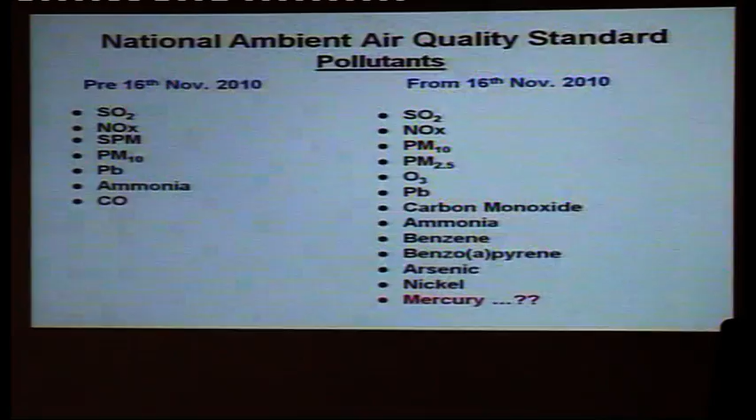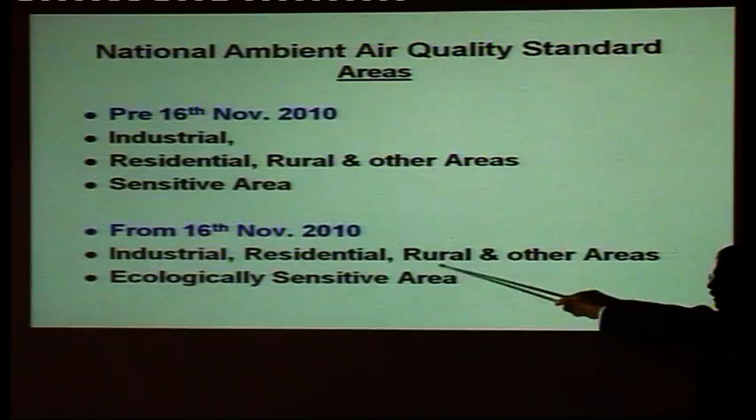Now the ambient air quality, this has already been discussed with Dr. G.D. Agarwal. Now only two guidelines have been left. The industrial area classification has been done away with.

Now why do we monitor ambient air quality? Because we have to comply with the standards that have been set, certain limits are there. We cannot see by naked eyes whether the pollution is there or not, or what the level is. If the level is high, we have to identify the sources and take remedial measures, the control measures, the control equipment to be installed.

So we have to monitor the ambient air quality, depending on the situation, to assess the health effects and potential damage to property, and to determine the background level of pollution.

Suppose you are going to set up an industry, under EIA the baseline quality is to be established. What is the status before the plant comes up, and what will be the status after the plant is commissioned. That is done by mathematical modeling.

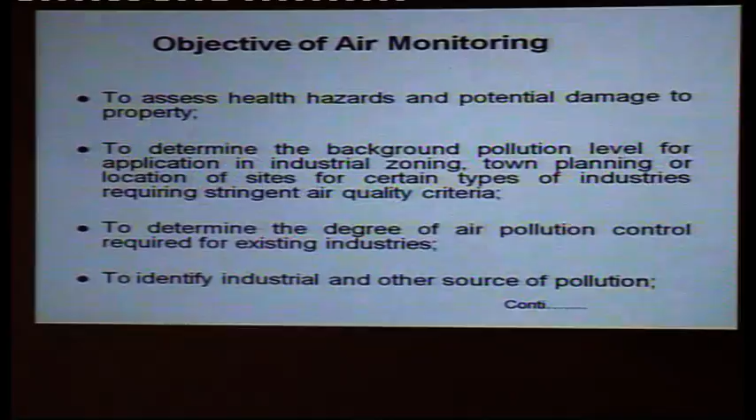The baseline and the predicted values are superimposed, and we come up with the ultimate quality of the ambient air. So we can foresee the management tools needed.

The criteria pollutants depend upon the location; certain pollutants are already specified. Those pollutants which are not specified are sometimes asked to be monitored depending on the industry. Like in the petroleum industry, you have to monitor VOCs and hydrocarbons also, as required by local state pollution control boards.

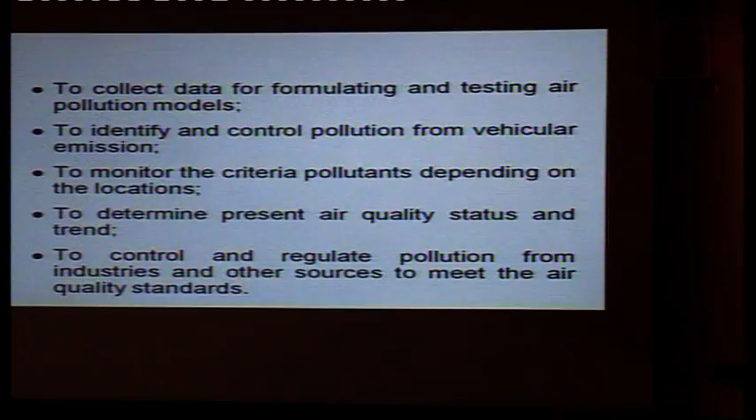Now we come to site selection. The site selection criteria is important. Quality assurance and quality control in air quality monitoring is essential, along with the type of pollutant to be monitored in a city.

If you are monitoring in the city, we have to look for vehicular emissions, because in the urban area the major pollution is from automobiles, besides the industrial locations.

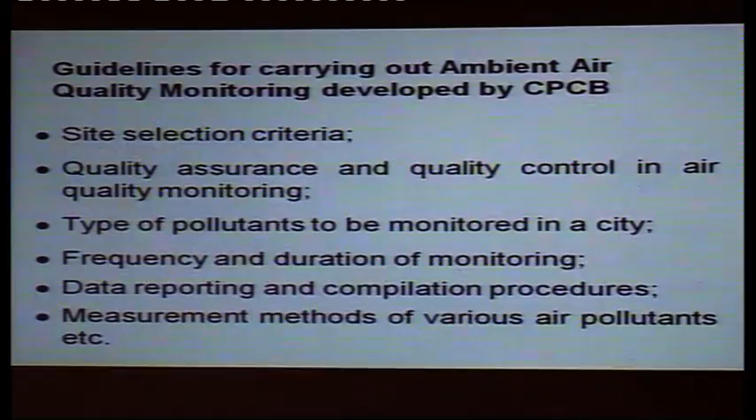The site should be representative of the location being assessed. It should not be unduly influenced by its immediate surroundings unless that influence is specifically being measured—for example, near a busy road, a factory stack, or a dusty quarry. The site should not be subject to flooding, and the site's classification or situation should not change over time.

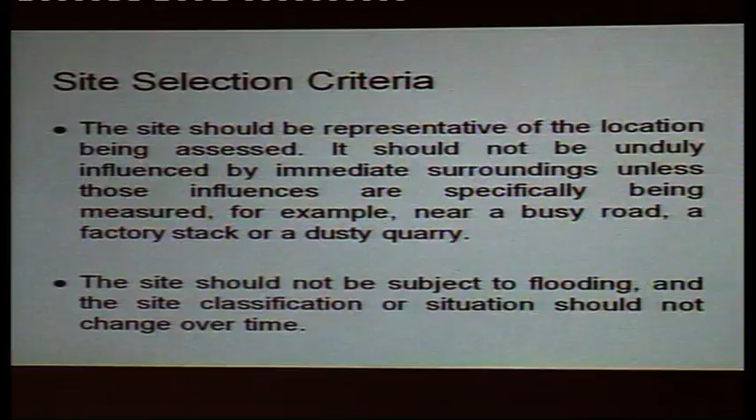Certain other requirements are also considered, such as accessibility of the site, power requirements, and safety. These are to be considered when fixing the monitoring station.

One has to feed them with fuel, and fuel will also emit certain pollutants which can interfere with the local air quality. If we have to do the monitoring with the help of these generators, they should be kept downwind, at least 100 meters away from the samplers.

Now coming to sampling: suppose we want to sample any environment, we need three things. First, a suction or vacuum device, and a metering device to measure at what flow rate we are drawing the air. Ultimately, we are interested in knowing the exact quantitative volume of the air that has been sucked.

And then a trapping device—for particulate matter, this may be a filter. For any gaseous volume, we have to impinge or adsorb it on charcoal. If it is an organic compound, it has to be absorbed in silica gel or activated charcoal. If it is an inorganic gas, it has to be absorbed in a proper solution, which can then be subjected to quantitative analysis at a later stage.

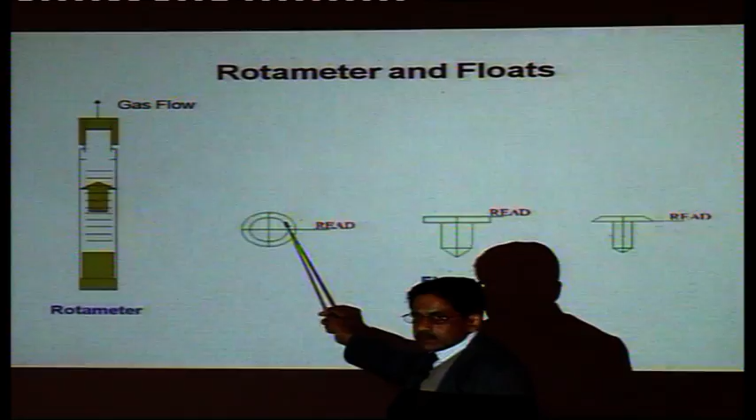First of all, the reading should be taken at the eye level, straight. If you take a reading from here, you will find a higher value. If you take a reading from here, you will find a lower value. So one should know what is the exact flow rate of the rotameter.

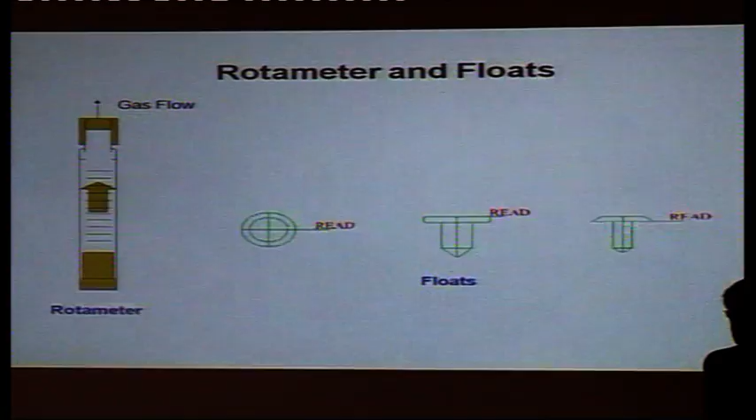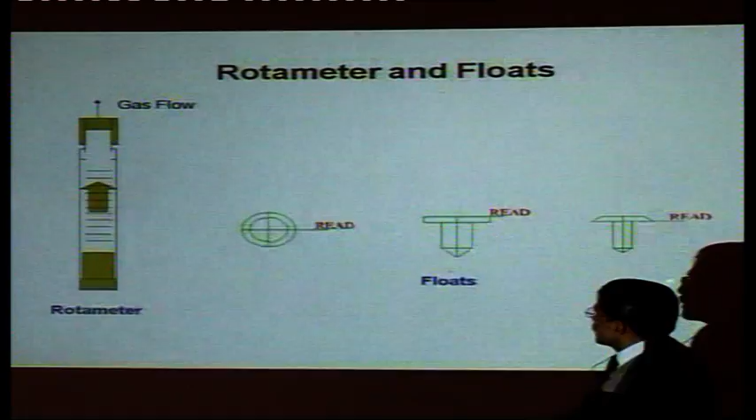There are various types of rotameters available in the various machines manufactured by different manufacturers. Suppose we have to take the reading at the widest part of the float. This is circular, you have to take the diameter at the highest point. This is a float, we have to take the reading at the upper float. And in this type of float, we have to take the reading at the widest part of the float.

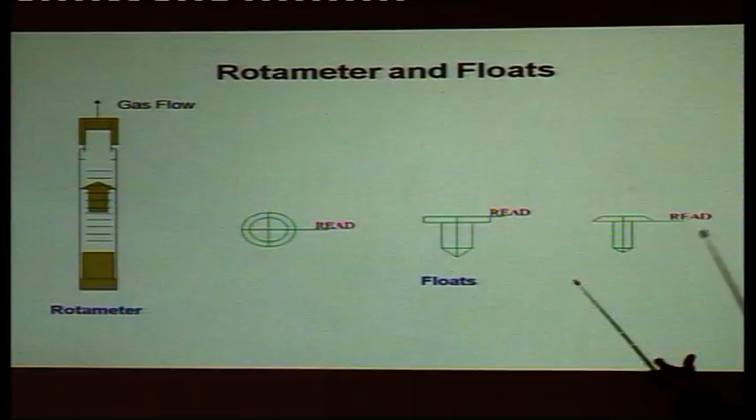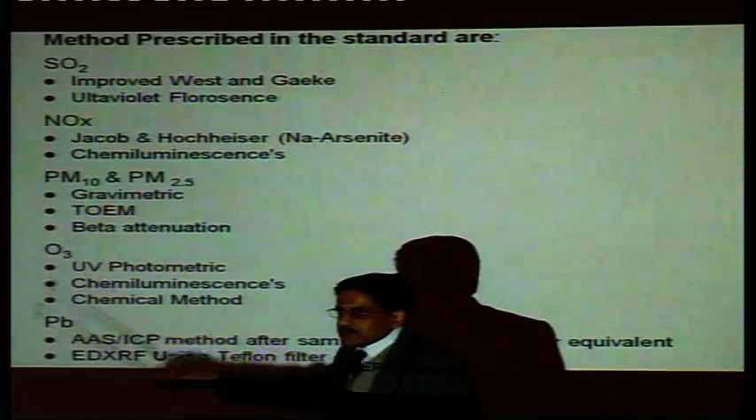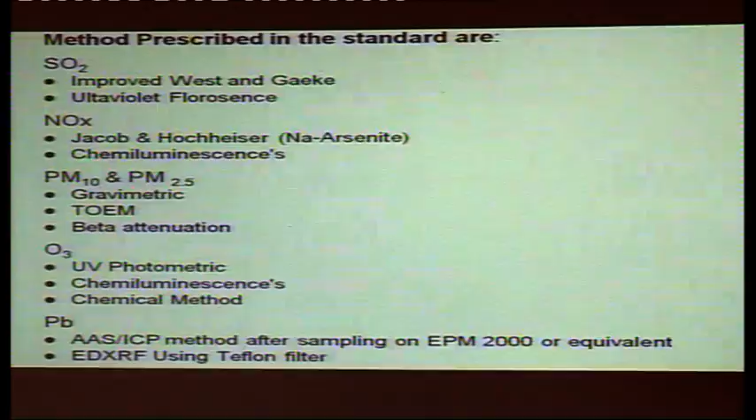For lead, it can be done by AAS, ICP, or emission, EDXRF using Teflon filters. CO can be measured using non-dispersive analyzers. It is recommended by the board, but BIS standard says it can be monitored by a number of methods. But those methods are not realistically possible.

One method is a CO detector. The CO detector has a limitation, it cannot work at ambient air quality levels. The level present in ambient air quality, it cannot monitor that level. Generally, ambient air quality CO is now available at less than 1 or 2 ppm, so that is not possible to monitor with detector tubes. And besides, if we can monitor those limits, the results are about plus or minus 10 to 20%.

One method given in the BIS method for CO is iodine pentoxide. If you monitor through the iodine pentoxide method, you need to keep the sampling tube at 175 degrees centigrade in the field. So you have to carry a small oven in which you put this tube, and you have to maintain 175 degrees centigrade, which is not possible.

Then we can have gas sampling bags. Any gas sampling bag will not do. The Mylar or Tedlar bags, imported from the USA by SKC company or some equivalent make, do not interfere with the pollutants. You collect about 5 or 10 liters with this low volume sampler into a gas bag, take the bag into the laboratory and do the analysis by GC-TCD, or by converting it into a catalytic converter with FID. This is how CO can be done.

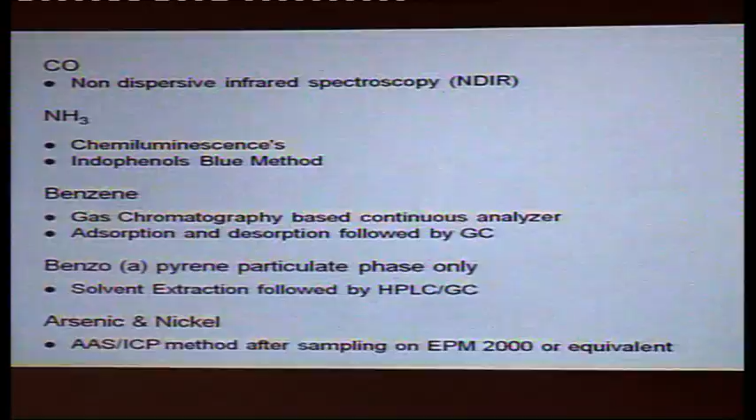Benzene is measured by a gas chromatography based continuous analyzer, or by adsorption and desorption followed by GC. Benzopyrene is in the particulate phase, it can be extracted by solvent extraction and quantified by HPLC GC, which can be covered later on. Arsenic and nickel are measured by AAS and ICP.

The type of sampling we are interested in for monitoring average air quality is 24 hour or annual averages. For that matter, we have to take the readings as specified. But at certain times we are interested in episodic sampling, grab sampling, excursions. Suppose we are going to check as an enforcement agency for an industry, we want to take a grab sample, so in a short duration it is called a short duration sample. In contrast, batch sampling and baseline data is collected over 24 hours.

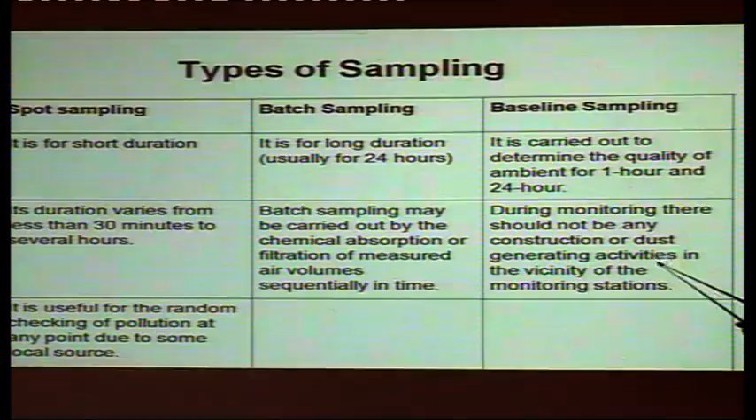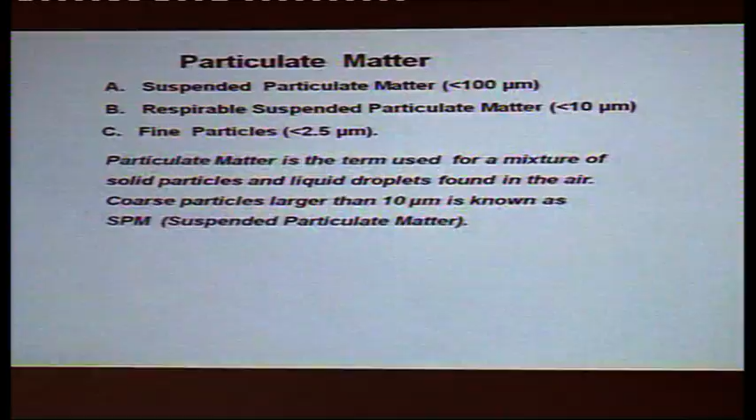Total particulate matter, all particles suspended in air less than 100 micrometers, is called suspended particulate matter. Respirable suspended particles are those less than 10 micrometers, and fine particles are called 2.5 micrometers.

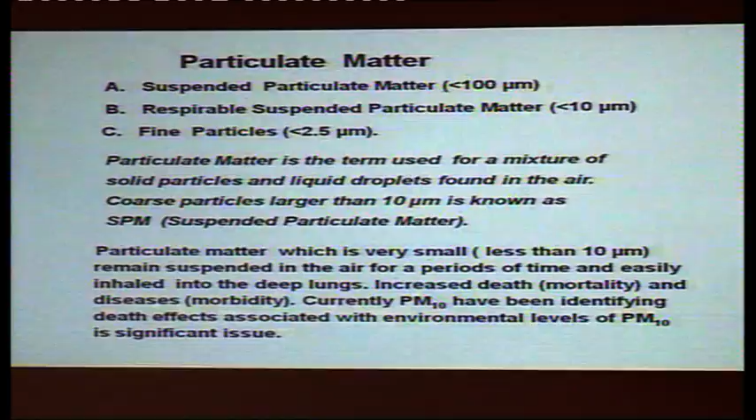As per the new notification, it measures PM10 and PM2.5. A known volume of air is passed through an initially weighed glass fiber filter paper, GF/A of size 8 into 10 inches. We are using this normal filter paper for gravimetric methods.

Suppose one wants to monitor arsenic, lead or trace metals. For metal, when you are going for trace metal analysis, you have to monitor lead, arsenic and nickel. But the people who have an ICP at their end can monitor a number of metals at one go without any extra effort.

If you want to monitor PM10 on the filter paper, then you have to use EPM 2000 filter paper. EPM 2000 is a low matrix filter paper, with low background metals present in it.

The centrifugal force acts on the dust particles to separate them into two parts.

The dust collected in the dust grit pot is added to the concentration with the RSPM values. The grit plus RSPM is then reported as TSPM. That is wrong, because you cannot recover 100% of the dust from the cyclone. Certain dust sticks to the inner side of the cyclone, which we are not accounting for.

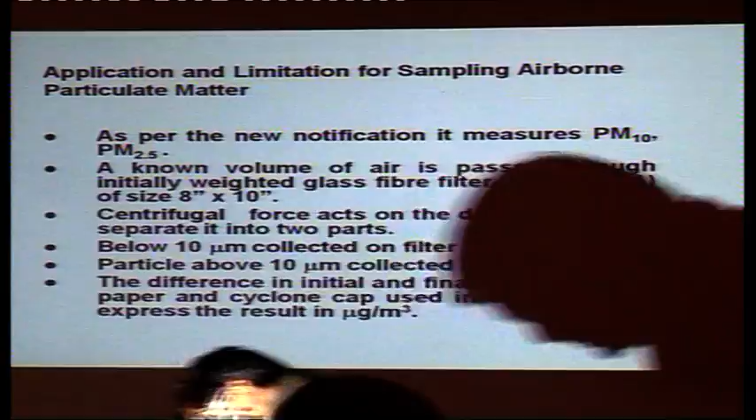The difference in initial and final weight of the filter paper and cyclone cap is used in calculation to express the results. If you are using the RDS sampler, then you can report the results as non-respirable fraction and respirable fraction. That is the other alternative.

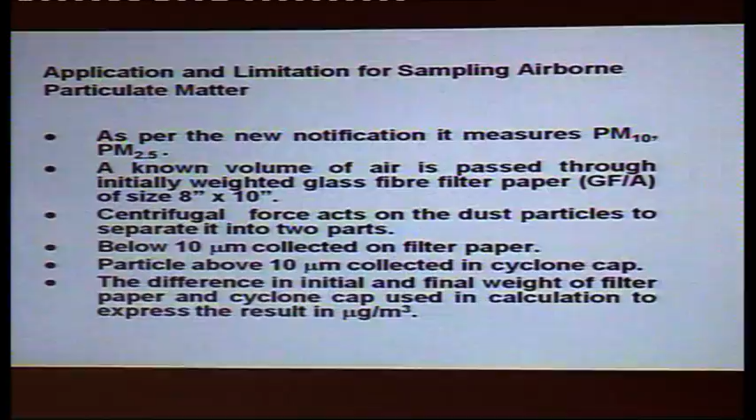Next, the filter paper is to be conditioned. The filter paper should be conditioned between 20 to 25 degrees centigrade and relative humidity less than 50% for 16 hours prior to weighing. Use fresh carbons.

Now, two types of motors are available for monitoring with the RDS: one with carbon brushes, and one brushless. When you are using carbon brushed motors, you have to take the precaution that when the carbon brushes have less than 5 millimeter length, you discard those filter carbon brushes, because otherwise they will harm your commutator and the motor will be burnt. Number one.

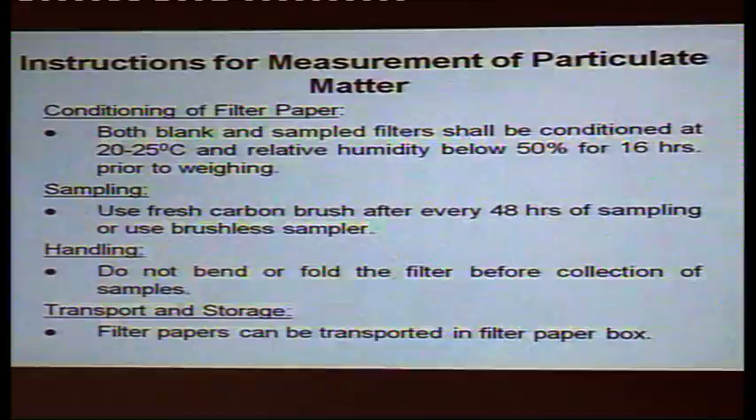Do not bend the filter paper before collection of the sample. The filter paper can be transported in filter paper boxes or in polythene bags. Next.

This is PM10, sampling of the respirable dust. This is wrongly printed here. This is part 23, involving the principle of filtering.

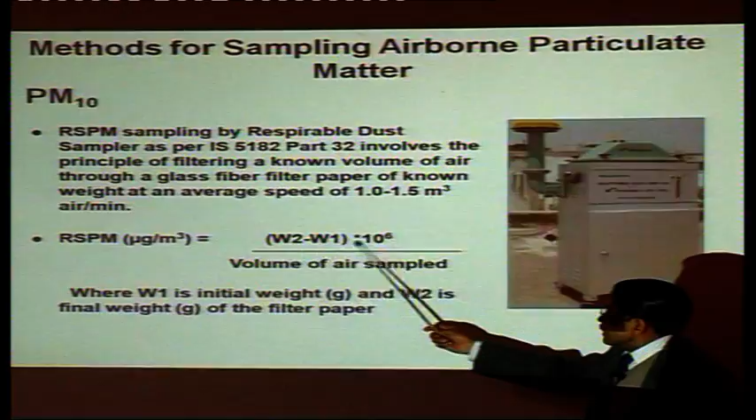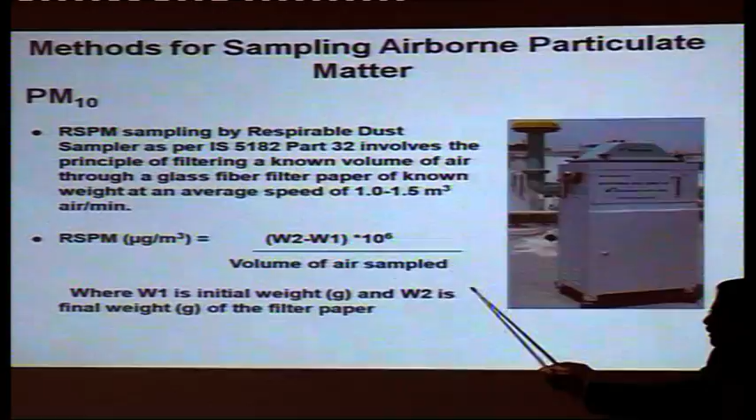Whatever dust concentration is there in grams has to be multiplied by 1000 to convert it into milligrams, and again multiplied by 1000 to convert into micrograms. This is the volume sampled in cubic meters. The volume is to be in cubic meters.

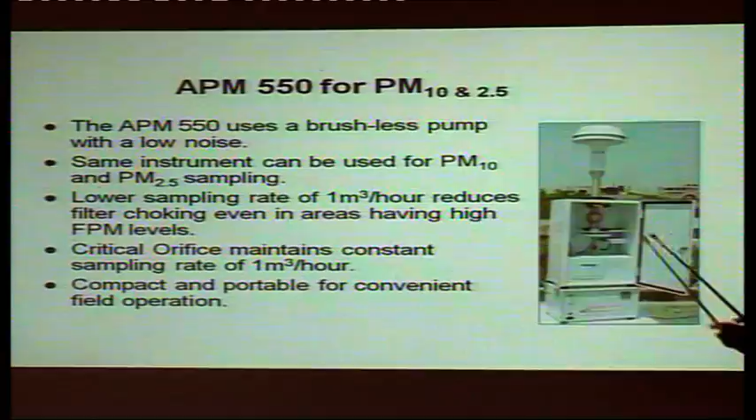Next, here you have seen the APM 550. By using this instrument, you can monitor PM10 or PM2.5 by changing the impactors.

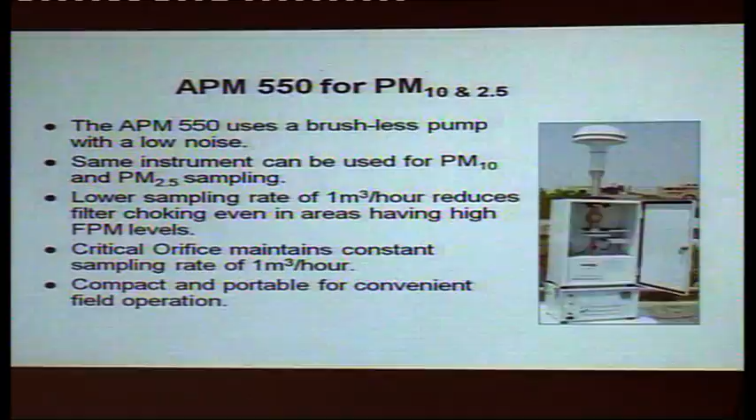Ideally, if you are monitoring ambient air quality at the same time, you should use two samplers, so that you have a comparison, because when you are monitoring PM10 one day and PM2.5 another day, the weather conditions and air pollution levels may not be the same. If you want to compare the results of the same day, you should use two instruments simultaneously.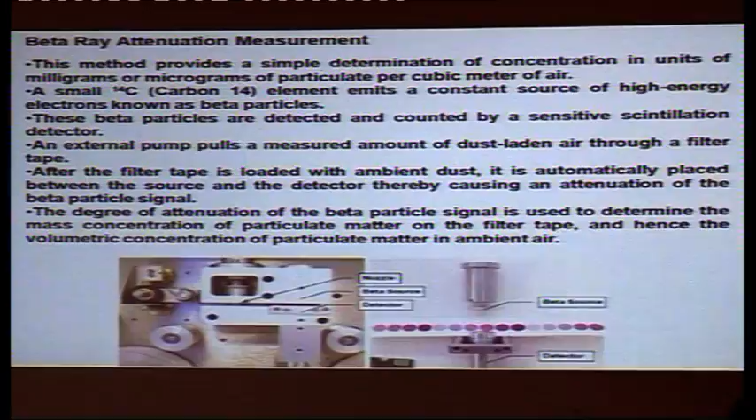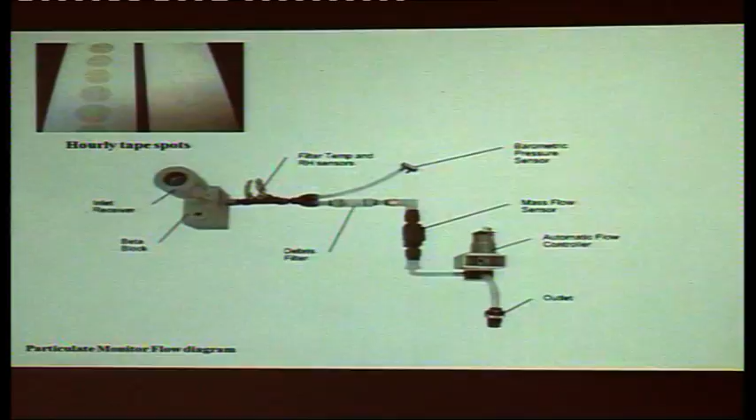Next, please. In the beta attenuation method, we also get these filter paper circles. We can take out these circles and analyze them, and a number of samples can be put together and analyzed for the chemical fraction. Next.

RDS is to be installed at a height not less than 1.5 meters. Ideally, it should be at a height of 3 meters, not more than the first floor of the buildings. Switch on the instrument and adjust the timer reading to the required hours of sampling flow rate.

Adjust to 0.5 liters or 1 liter depending on the need. First, run the machine for at least 5 minutes and let the motor stabilize. When the flow is stabilized, only then should you set the volume on the rotameter. Otherwise, it initially gives a higher reading. When the motor stabilizes, it gives the correct value.

Fill the filter impinger with 10 ml of the absorbing solution. Sampling is done for 4, 8, or 24 hours depending on the need.

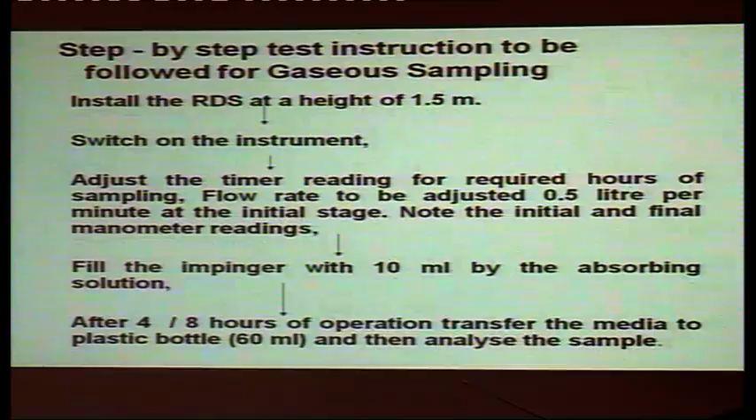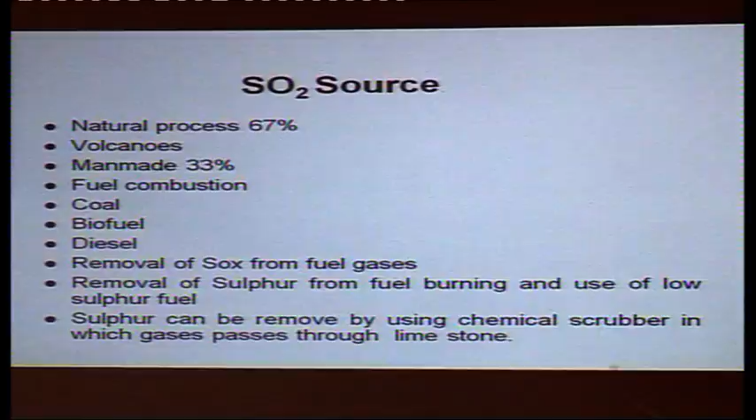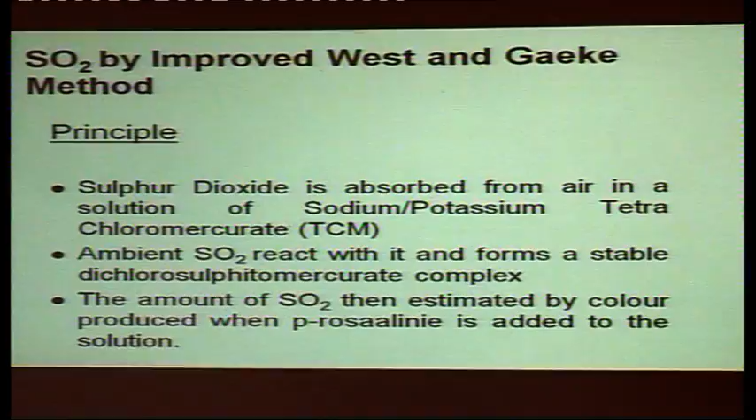Next, for SO2, the standards are here. Sulfur dioxide is absorbed from air in sodium or potassium tetrachloromercurate. Ambient SO2 reacts with it to form a stable dichlorosulfito-mercurate complex. The amount of SO2 is then estimated by the color produced by para-rosaniline.

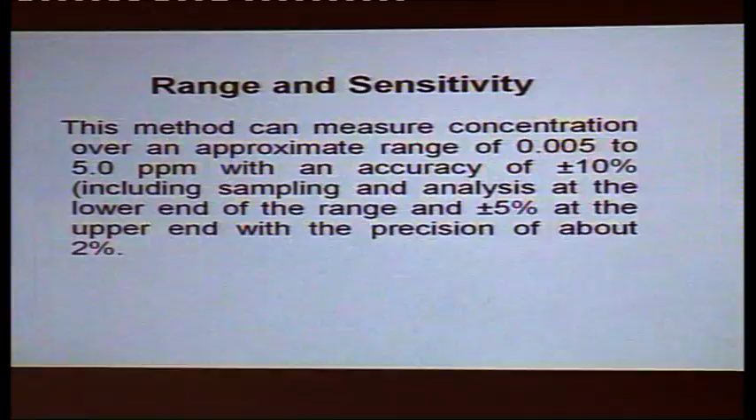The range of this method can easily measure up to 5 ppm.

Take about a 10 ml portion of the sample and add the chemicals in the same order: first 2 ml sulfamic acid, then 2 ml formaldehyde, then 1 ml para-rosaniline. After 20 minutes, read the absorbance at 560 nanometers on a spectrophotometer, using a blank as a reference.

The blank may be the same absorbing solution. The same absorbing solution should be used, in which no air is drawn.

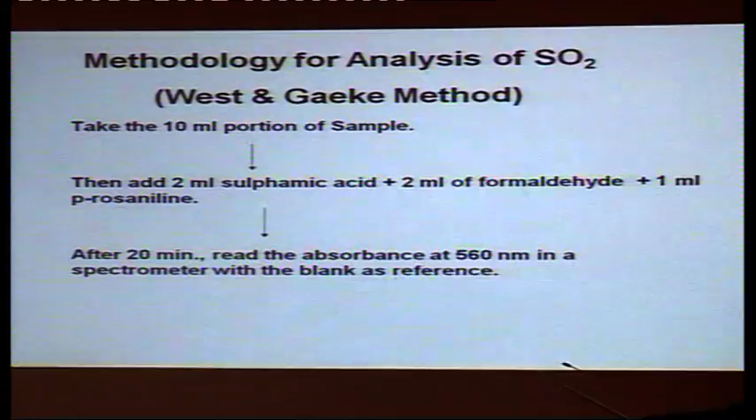The equipment needed for this includes a midget impinger containing the solution, a pump suitable for the desired flow rate of 0.2 to 1 liter, a volume meter, a thermometer, a manometer, and a timer.

This can be used with the RDS or HVS you are using right now, which has a gas sampling attachment. You can use the gas arrangement for up to 4 gases, because ideally 2 impingers should be used for 1 gas, just to check for breakthrough or untrapped gases escaping. But in ambient air quality monitoring, the concentration is very low, so you can use one impinger for each gas: one for SOx, one for NOx, one for ammonia.

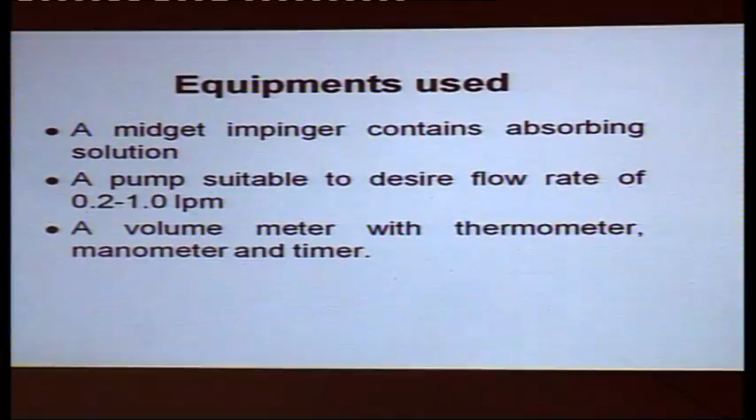These are the chemicals required for this analysis, already given in the printout.

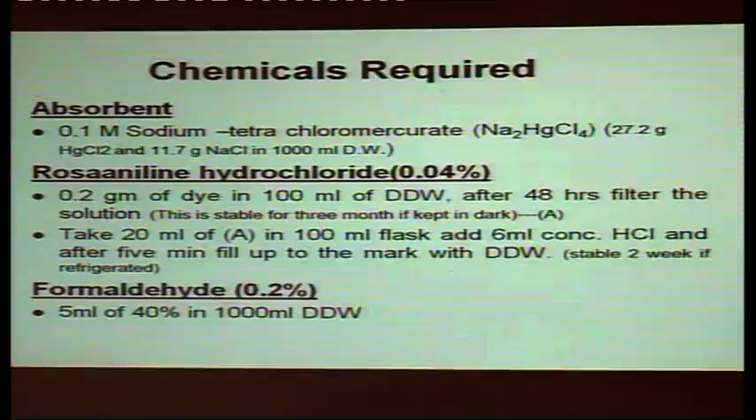Now we come to the standard, how to prepare a standard curve for SOx. We need a standard: 0.0123 N sodium metabisulfite 1 ml is equal to 150 microliters SO2. If you want to exactly prepare this concentration, how do you prepare this 0.0123 N sodium metabisulfite? Because it is not a primary standard, it has to be standardized first against iodine.

So you take about 640 milligrams, slightly higher than 640 milligrams, of metabisulfite in 1 liter of double distilled water, and standardize it with iodine using starch as the indicator.

One can find out how many such standards need to be made by just 1 or 2 staff in an industry. For that, you can use CVS iodine available from standard companies like Ranbaxy, Merck, or Qualigens. They supply concentrated volumetric solutions.

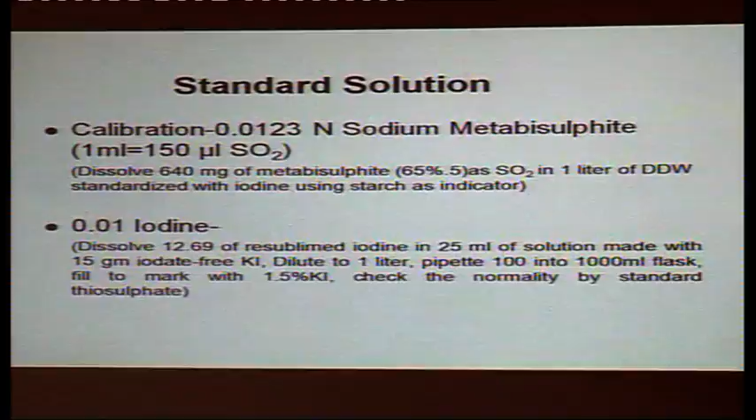It is always better to have a concentrated solution. If you standardize a higher concentration, you can dilute it to the desired strength using the formula N1V1 = N2V2. Suppose you want to prepare 100 ml of a 0.0123 N solution: put 0.0123 multiplied by 100 equal to the normality of the standardized solution multiplied by V. So you can find out what V is.

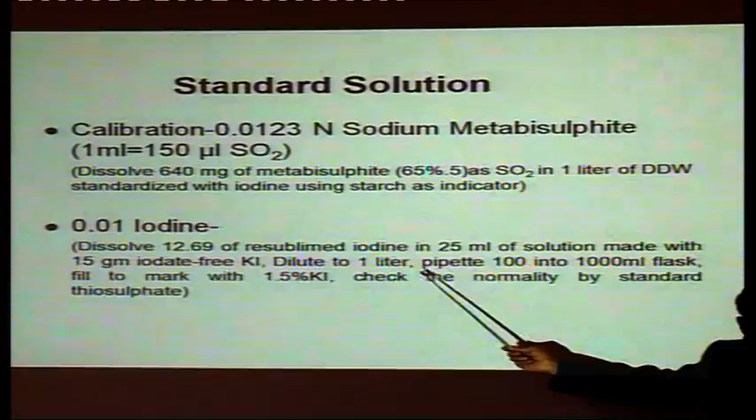This is the sulfur dioxide analysis by the fluorescent method. Sulfur dioxide absorbs UV light energy at 190 to 230 nanometers, free from interferences, and comes to an excited state, producing fluorescence which is measured by a PMT.

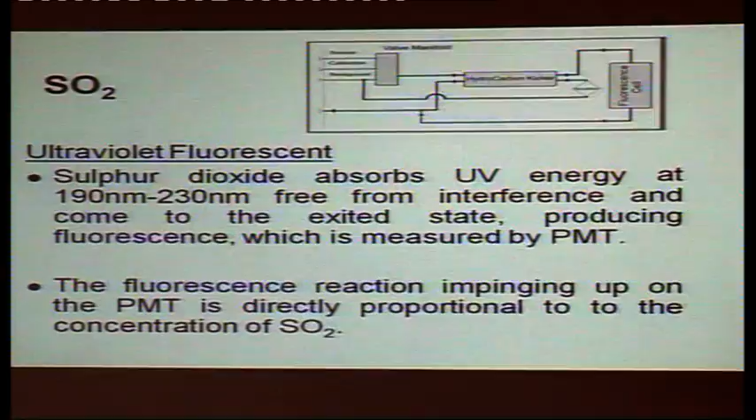This is the flow diagram. This will be covered again by Dr. Gawal.